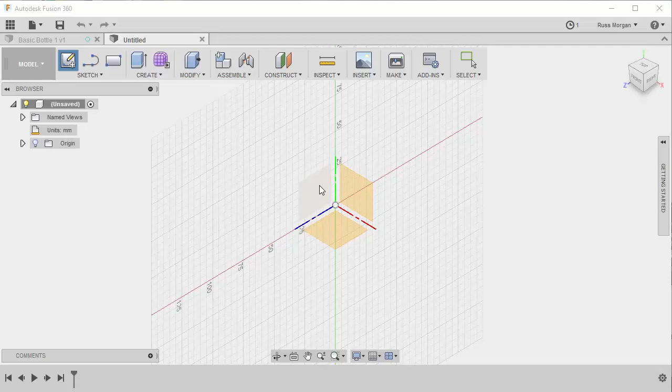So I'm going to go again for a new sketch. This time I'm going to draw it on a side, so I'm going to choose this plane here, and I'm going to basically use a straight line tool to start with. I'm going to use a normal line, and from this point here I'm going to click once and come out 30 mil, then escape, and draw another line from the same point.

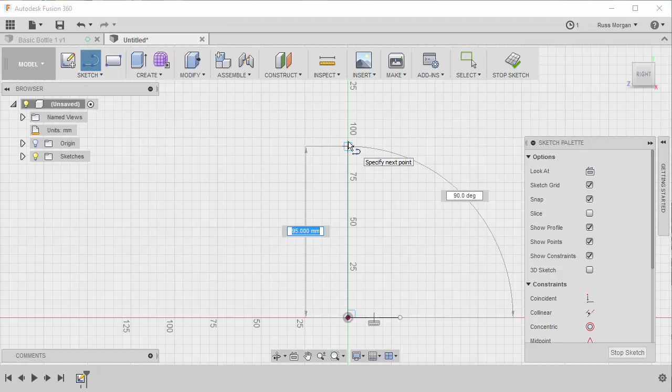This time I'm going to come upwards. You can see you get a readout as you go along of the dimension and of the angle, so 90 degrees is fine for what I want, but height, I'm going to make my height 210. So I'm going to press enter a few times. Now the top of my line is up here.

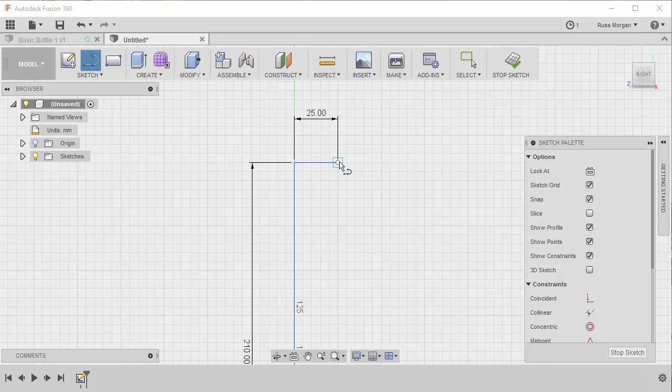I'm going to put another line on again from the starting point here. I'm going to come across and make this one 25. Press enter, and I'm going to do one more line of this style, and come down from here 30. So I might type in 30 to get it more accurate, and press enter.

Okay, so what I've got is the outline of a bottle. This is going to be the base, this is going to be the neck, but I need to join them together to make a kind of bottle shape.

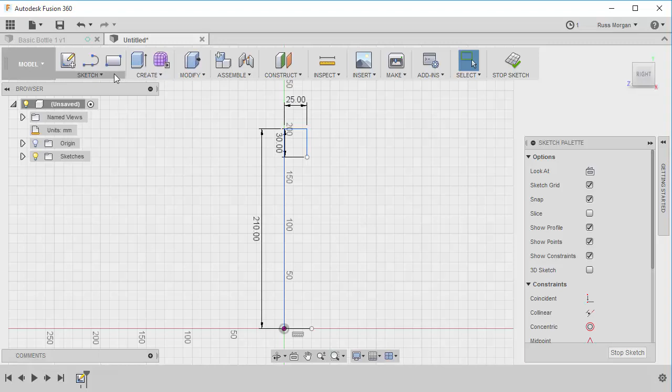So I'm still in my sketch mode. I'm going to go for a different type of sketch now, an arc, and I'm going to do what's called a 3-point arc. Basically it's going to say you want the start point, the end point, and then a middle point. So my start point is going to be here, my end point is going to be about there, and then I'm going to decide on a curve, something maybe like that will do.

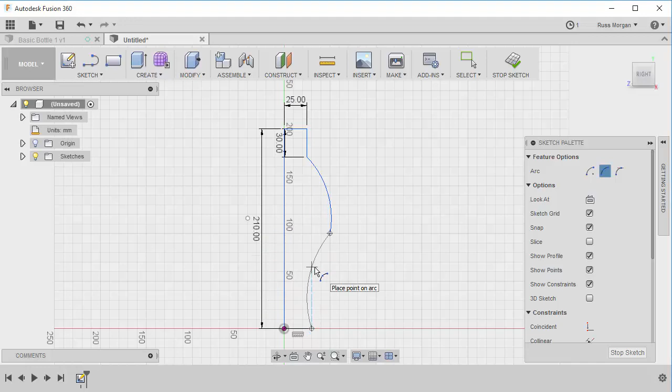And I'm going to use the same tool again. I'm going to go start, finish, and this time I'll make it interesting - I'll put an internal curve this way and click OK. Now you can see as soon as I did that, this filled in with a colour, so it knows that this is a sealed shape all the way round, all the points joined together.

I'm going to stop my sketch there, and I'm going to use a tool called Revolve. So I'm going to come here and look for Revolve, which is this one. Click on Revolve, and it's asking me for two things - it wants to know my profile and my axis. So I'm going to do my axis first.

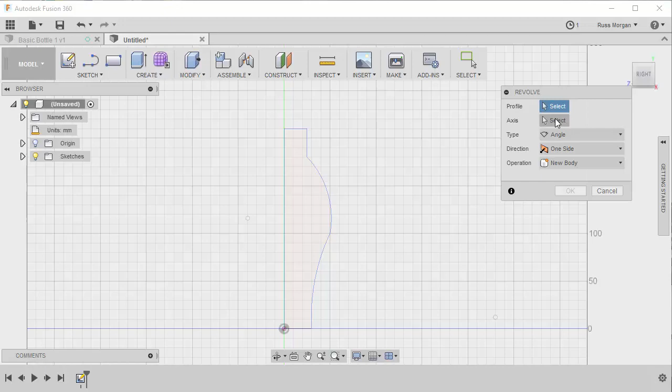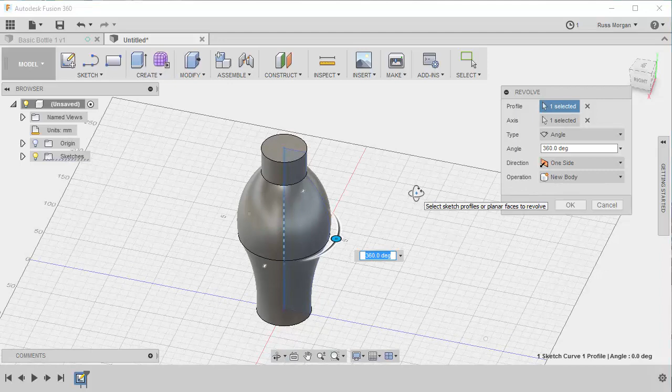The axis is the line that I want to revolve around, which is this one, so I'm going to click that one. Then I'm going to go to the profile and select this one, and you can see it's asking on here, do I want to go 360 degrees, which I do - I want to go all the way around. So if I just move this into a three-dimensional view so you can see it, it's created that bottle from that profile. I'm happy with that, and I'm going to click OK.

So that's another way of drawing a bottle shape. Now, one thing I'd like to draw your attention to is that at any point you can still come back to your original sketch and change it.

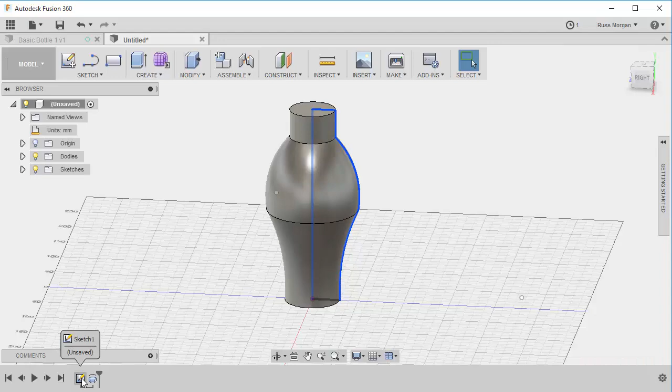So if I came back down to here and right clicked and said edit sketch, it was just off the screen there, but it's jumped back into my sketch. So if I decided I wanted to move something, perhaps move this point here to make a slightly different shape, now when I hit stop sketch, it goes back and you can see it's updated the shape of that bottle. So even if you do something and think maybe you wanted a different dimension later, you can go back and change it by affecting things on this timeline down here.